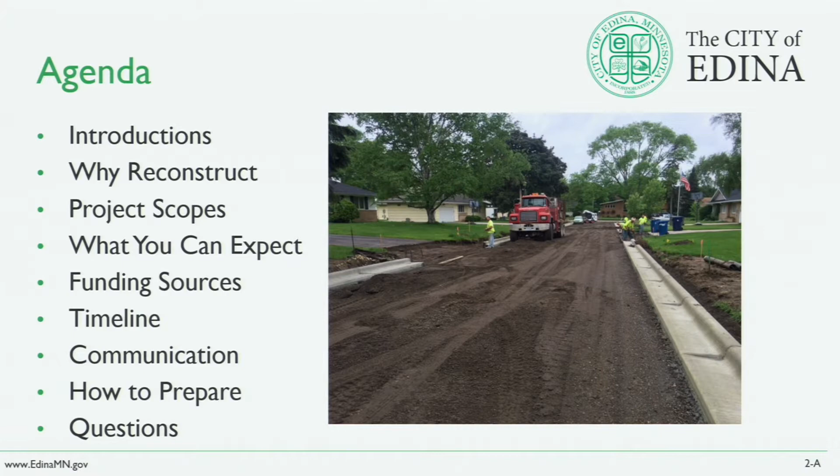Here's a summary of our agenda. We're going to go over introductions to the engineering department, why we're reconstructing your streets, the project scopes including roadway and utility improvements, what you can expect, the funding sources including estimated assessment ranges, the typical project timeline, communication including how we'll communicate with you and how you can provide input, how you can prepare for street reconstruction, and we'll conclude with the different ways you can ask us questions.

There are two reconstruction projects proposed for 2021. The Melody Lake neighborhood is located in central Edina. There are approximately 309 properties within the project limits, and it has primarily local streets with the exception of Benton Avenue and Hanson Road. Benton Avenue will not be reconstructed as part of this project as it is a state aid route and has recently had a large maintenance project completed.

The Creek Knoll neighborhood is located on the northeast side of Edina. There are approximately 113 properties within the project limits and it has primarily local streets. The neighborhood borders Minneapolis, and Minneapolis will be providing some cost sharing for 54th Street.

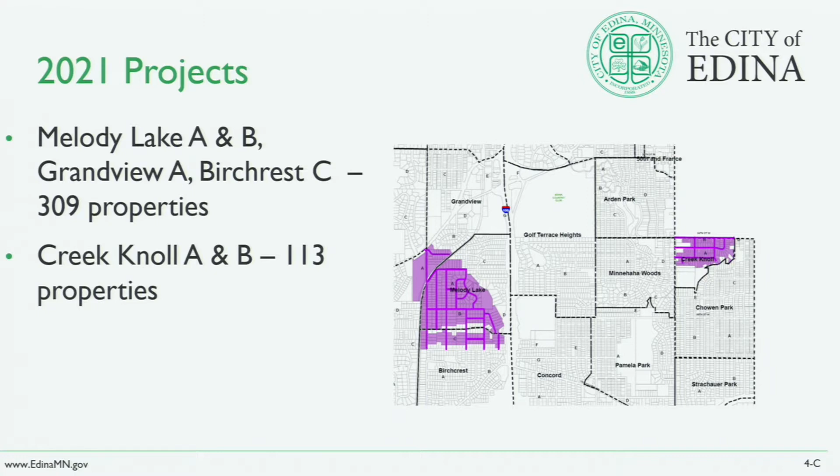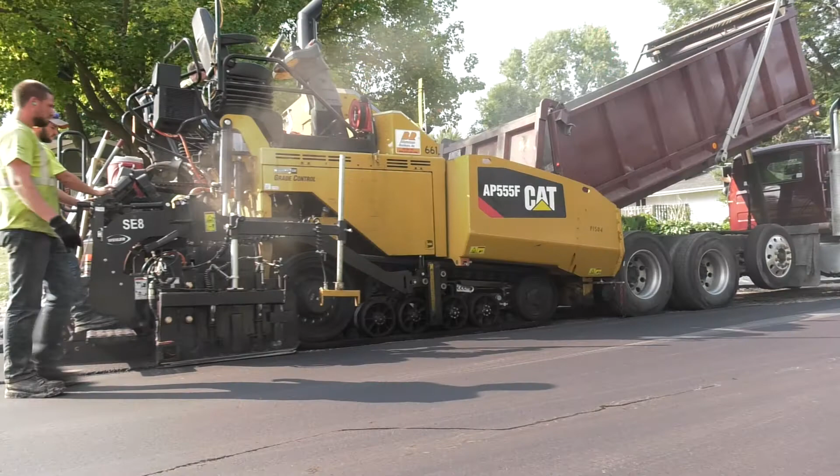People often wonder, why my street? Originally, as part of the initial street reconstruction program, streets were grouped into neighborhoods. Instead of picking and choosing streets randomly throughout the city for reconstruction, it was decided to choose neighborhoods. These neighborhood groupings allow for economy of scale for reconstruction and maintenance projects. By maximizing maintenance areas, pavement life is extended because more pavement can be reconstructed and maintained.

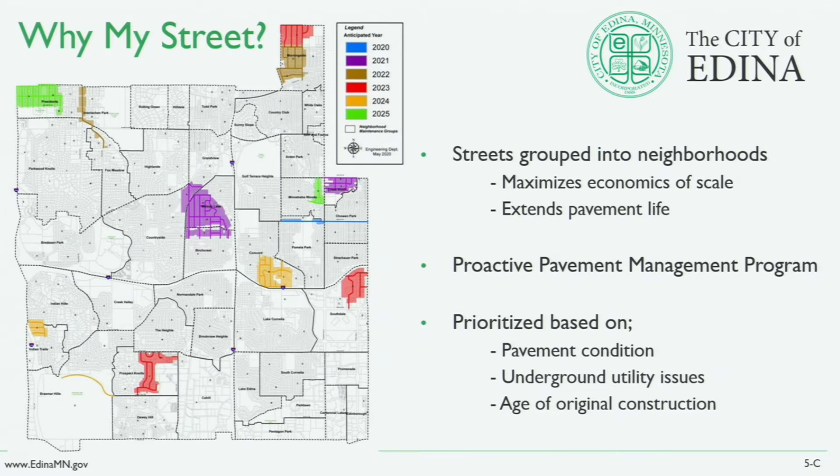In addition to neighborhoods being created, the city also started a proactive pavement management program. As part of this program, pavement conditions are evaluated every 4 years and given a rating of 0 to 100. 0 is a failed roadway or gravel road, 100 is a new roadway. When pavement conditions in a neighborhood average below a certain threshold, the neighborhood is placed into the reconstruction planning process.

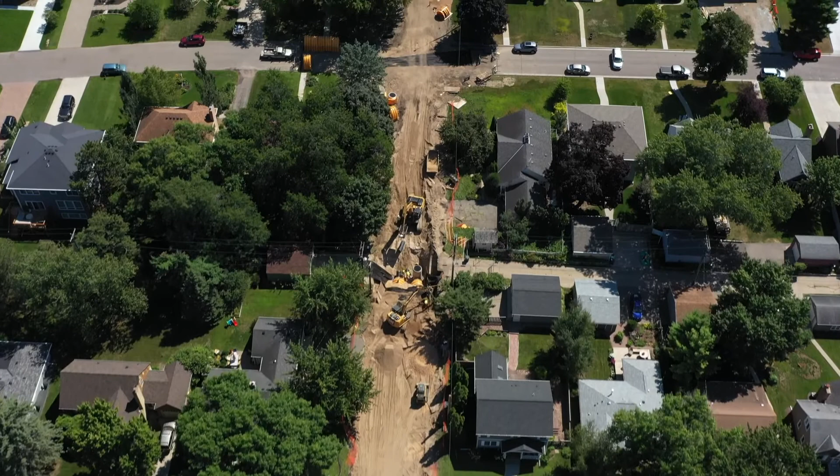In addition to pavement condition, the city also reviews the condition of any public underground utility or need for additional utilities as part of the street reconstruction program. The age of original construction is a factor, however isn't typically the driving force for any project.

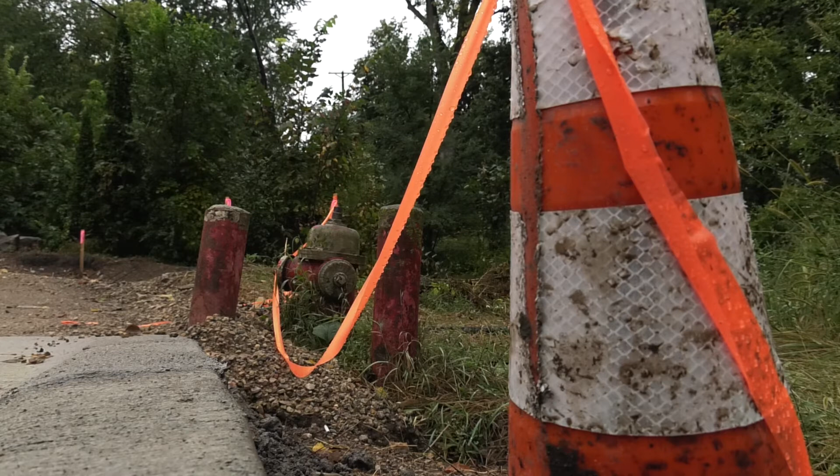So why are we proposing full street reconstruction? The streets were originally constructed in the 1940s to 1980s. Some of them are nearly 80 years old. You can see some of the streets that are in poor condition as noted in the photograph. There's also utility issues to address beneath the roadway. And at this age and condition, street reconstruction is more cost effective than other maintenance strategies like mill and overlay and seal coat.

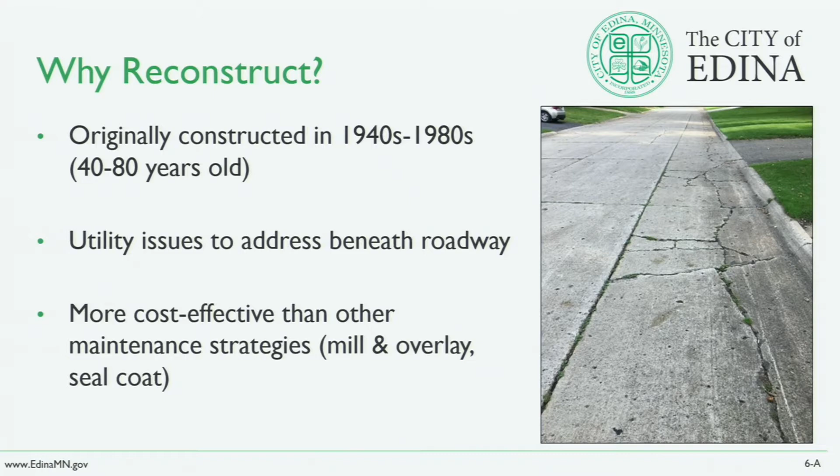Existing roadway conditions: the pavement is reaching the end of its useful life. Some of the streets are in very poor condition as shown in the photograph. Some streets have curb and gutter and some do not. Curb and gutter does help maintain the structural integrity of the pavement, particularly along the edge of the pavement. Some properties already have concrete driveway aprons and some do not.

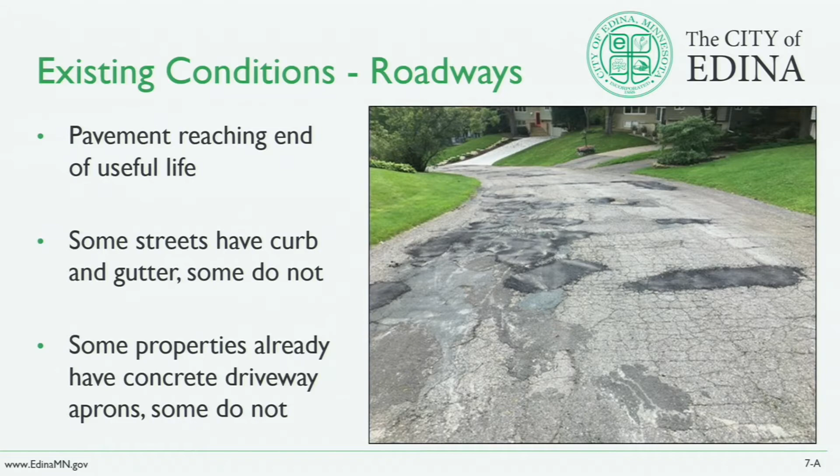We're also going to assess the existing conditions of the utilities in your neighborhood. We're going to look at the water main and analyze the existing pipes with some non-invasive technology. If those pipes show loss in wall thickness, we're going to consider them for reconstruction.

We're also going to see if there's any undersized water mains in your neighborhood, and if there are, we're going to replace them. We're going to look at the sanitary sewer and see if there's any localized defects, cracks, breaks, or sags, and we're going to replace those. We're also going to see if there's any inflow and infiltration occurring in that sanitary sewer system, and if there is, we're going to fix it.

We're going to look at your storm sewer, see if there's deficiencies in the structures of the catch basins or the pipes themselves, and look at the pipes to see if they're undersized. We're also going to look at your curb and gutter to see if it's failing, and if it is, we're going to replace it.

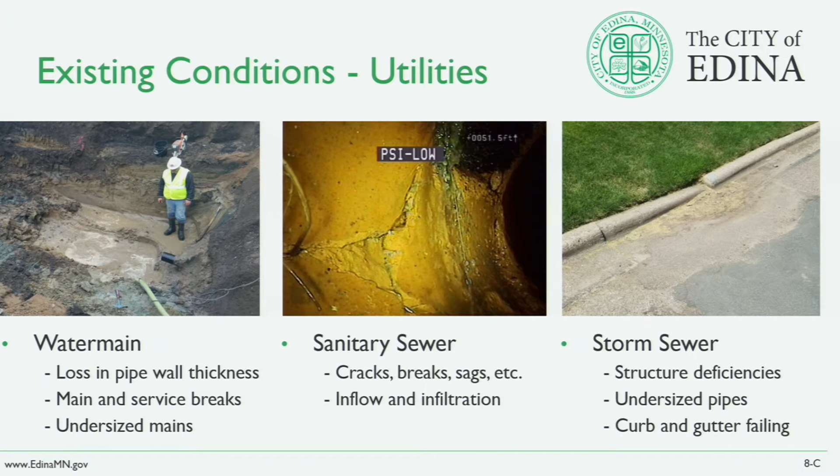We're also going to look at the right-of-way and look at what's in it. City staff will inventory and assess private infrastructure in the public right-of-way. Some private infrastructure might include unique or extensive landscaping, sidewalks from the roadway to the resident's home, steps, mailboxes, and other decorative features. We will also identify any irrigation systems or pet fences that will likely be disturbed by our construction project. All of these items will be repaired, reinstalled, or replaced as part of the reconstruction project.

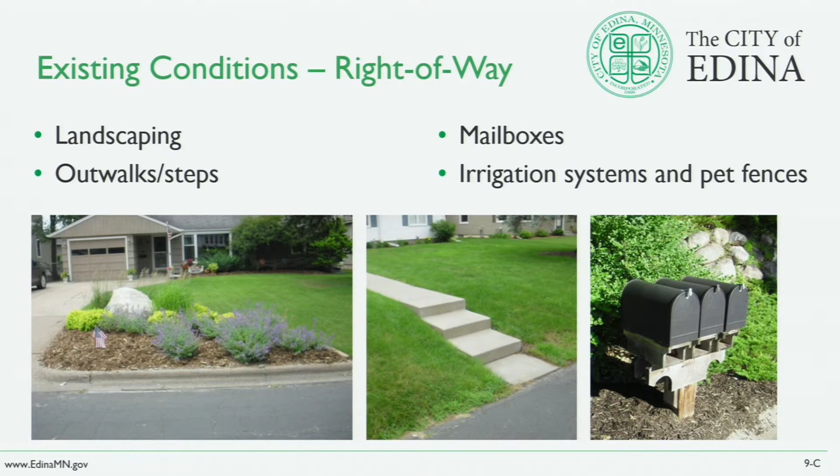As construction nears, our project team will coordinate with individual homeowners any needs their particular property may have with regards to these items. What is the right-of-way, and where is it located in relation to your street?

The right-of-way is typically for public streets, alleys, sidewalks, and public and private utilities. As referenced in the exhibit, the right-of-way is typically 60 feet wide for local streets and 66 feet wide for municipal state aid streets. Municipal state aid streets are typically your higher volume streets and your non-county roads.

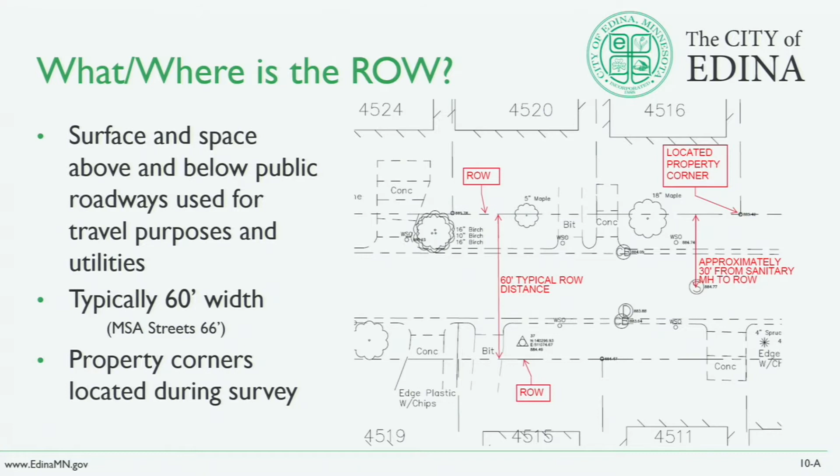Many of your streets are roughly 30 feet wide today. That leaves an additional 15 feet of right-of-way on either side of the roadway. We survey a portion of your property corners to determine the right-of-way location. I bring this up because the contractor may be utilizing the majority of the 60-foot right-of-way for construction or storage of materials.

Proposed roadway improvements. We're proposing concrete curb and gutter where no curb and gutter exists today. We're also proposing replacement of curb and gutter, either all of it or just portions of it. Curb and gutter replacement is primarily based on either the condition of the existing curb or the potential for utility improvements that may impact the curb and gutter.

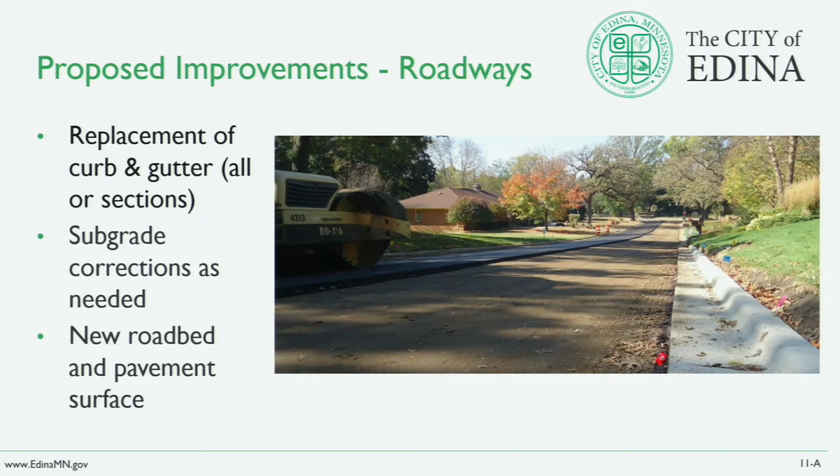Subgrade corrections may be needed. If the soils underneath the pavement are soft and spongy, we'll replace those with more stable soils. A new gravel roadbed and asphalt pavement surface will be installed. There are concrete streets along a portion of these neighborhoods. Those concrete streets will be replaced with asphalt pavement.

Other proposed improvements include modern design elements such as the Edina Living Streets Plan that was adopted by the Edina City Council in 2015. The Edina Living Streets Plan creates a set of standards that balances needs of motorists, bicyclists, pedestrians, and transit riders by incorporating minimum roadway design elements.

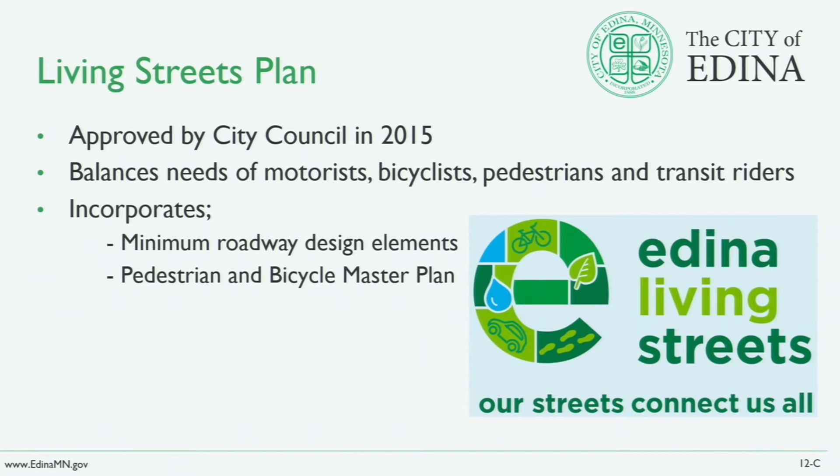The Living Streets Plan also allows for uniform build-out of the pedestrian and bicycle master plan, which includes sidewalks, bike paths, and active routes to schools. As part of the Living Streets Plan, typical roadway sections were developed to be incorporated in reconstruction projects.

The majority of the streets in the 2021 projects are local streets without sidewalks. Typically, they will measure 27 feet from the face of curb to face of curb, offer 2 lanes of traffic, and parking on both sides of the street. More information regarding living streets and the typical sections can be found on Better Together Edina.

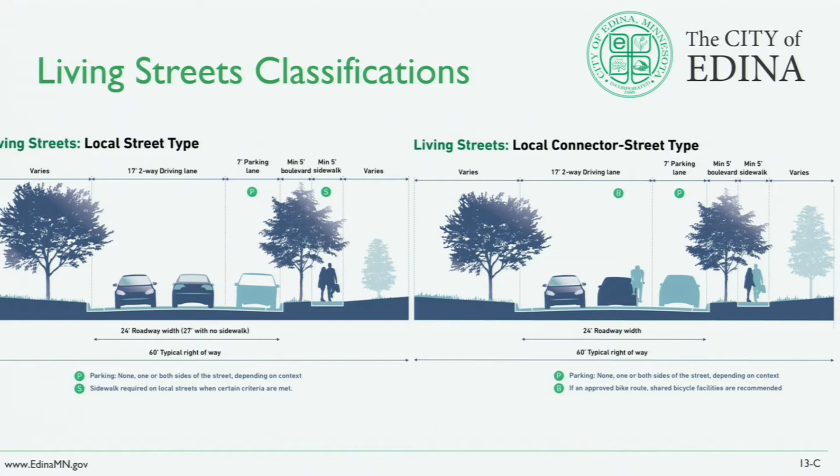Proposed driveway improvements. For projects getting new concrete curb and gutter, the end of your driveway will be impacted by construction. Therefore, aprons will be replaced or installed to comply with city standards. If you have special driveway materials that are impacted by construction, we'll replace those in kind to the best of our ability. Examples of special driveway materials include paver blocks, colored concrete, stamped concrete, and exposed aggregate.

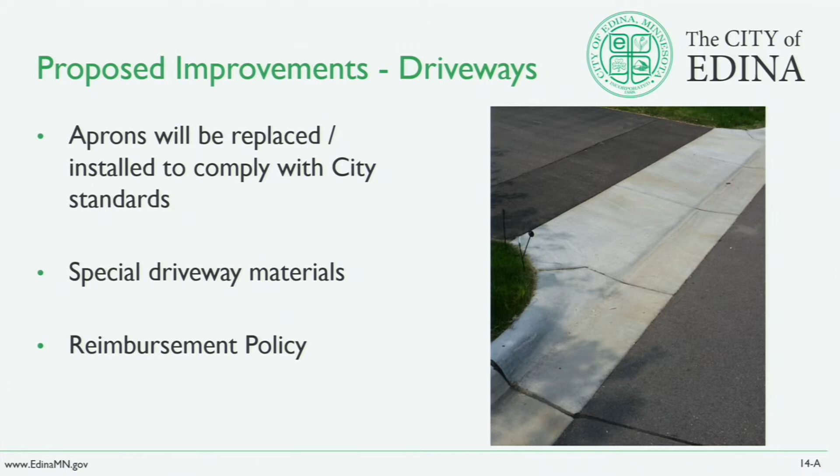If you hire a contractor to replace a portion of or your entire driveway during construction, the city will reimburse you at the city's contract price for the portion impacted by the street reconstruction. This is optional. If you do not hire a contractor to replace your driveway during construction, this reimbursement is not available, and the city's contractor will repair the driveway that's impacted by construction.

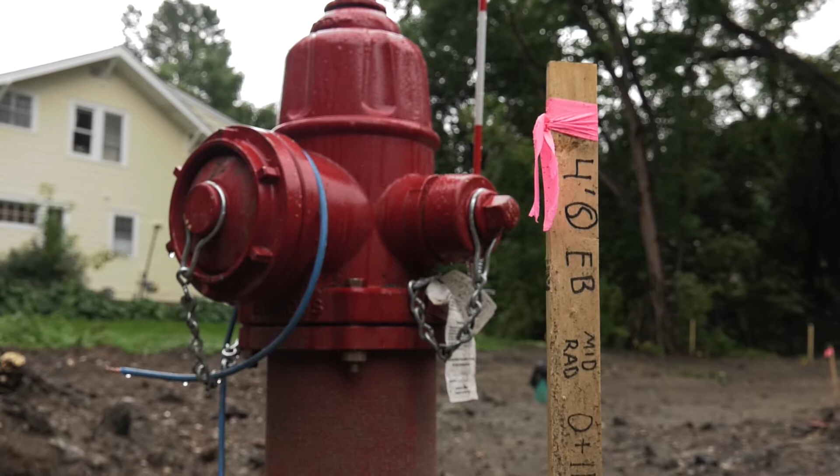Proposed utility improvements may include localized water main and service replacements. We will be looking at the condition of the existing water main pipe to determine if there's any pipe loss, as well as a history of water main breaks. We're proposing new fire hydrants to meet city standards, as well as replacing gate valves.

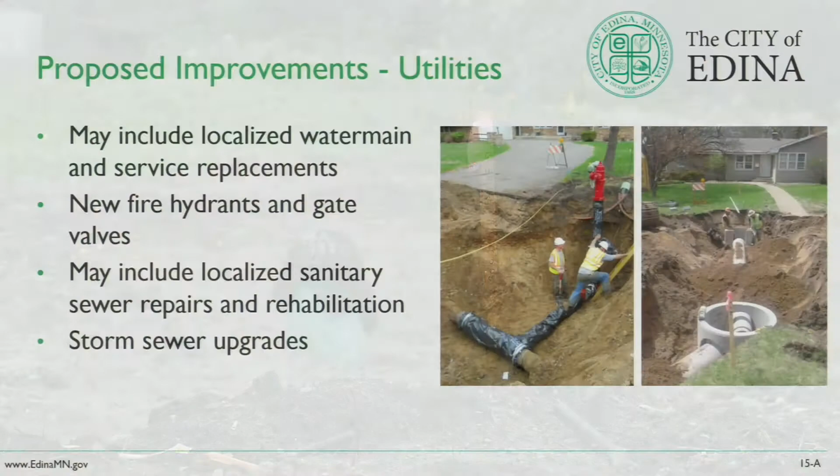This may include localized sanitary sewer repairs and rehabilitation, such as cured-in-place pipelining, which will minimize infiltration and provide structural pipe support. We'll also be looking at storm sewer upgrades, which include potential replacement or extension of storm sewer pipes.

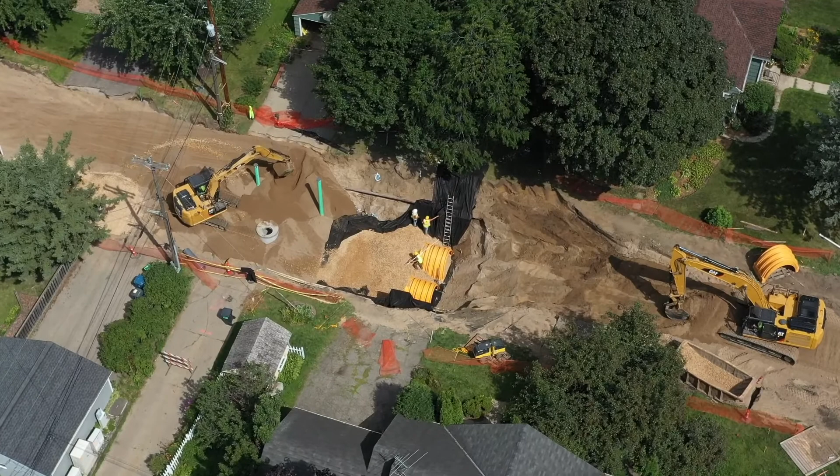When feasible and warranted, the city installs a sump drain line with reconstruction projects. This line allows homeowners to directly connect their sump lines to the city storm sewer network. The city encourages residents to connect when possible, but it is not mandatory. City staff will notify residents when the line can be connected to, and a homeowner will need to hire a private contractor to do the work, with a permit required.

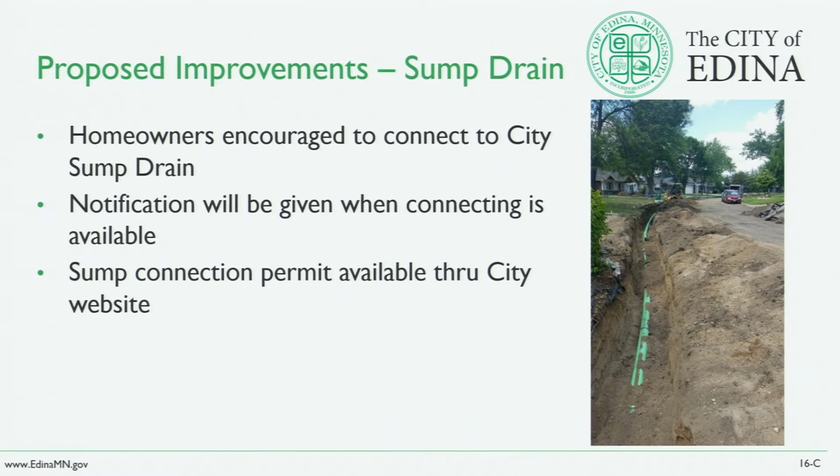Utility ownership, referencing water services and sanitary sewer services. The City of Edina owns the water service from the main in the street to the water shutoff, noted in the exhibit with the letter A. The water shutoff is noted with the letter E. Residents own the water service from the home to the water shutoff, noted with the letter B.

Residents own the sanitary sewer service from the home to the main out in the street, noted with the letters C and D. Many of the resident-owned services may be nearing the end of their useful life. Therefore, we recommend inspecting private services prior to construction.

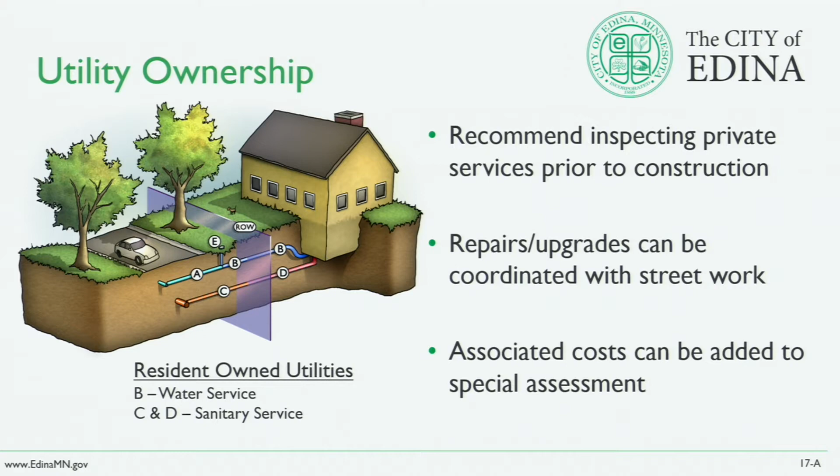If you inspect your services and deem that they need to be replaced, the repairs and upgrades can be coordinated during the street reconstruction work, or added to your special assessment. These repairs or upgrades are optional. However, if a repair of the sanitary sewer service is necessary after street reconstruction is complete and the street is damaged due to the repair, it can be much more expensive than if completed during street reconstruction. Therefore, we do emphasize inspecting your private services prior to construction.

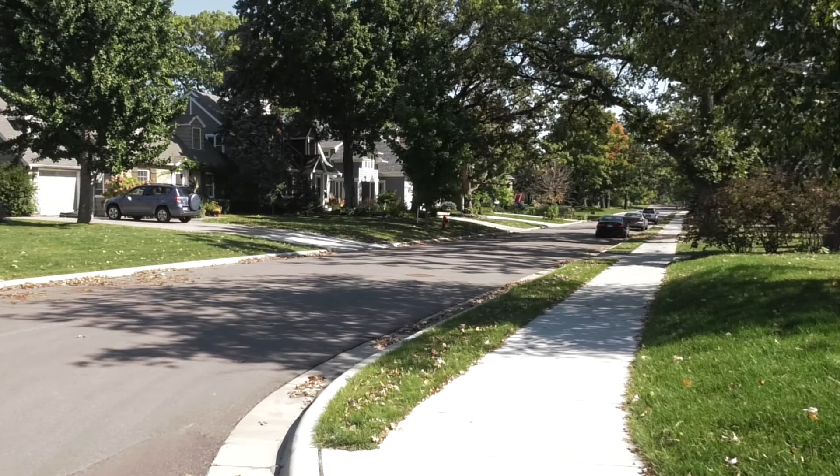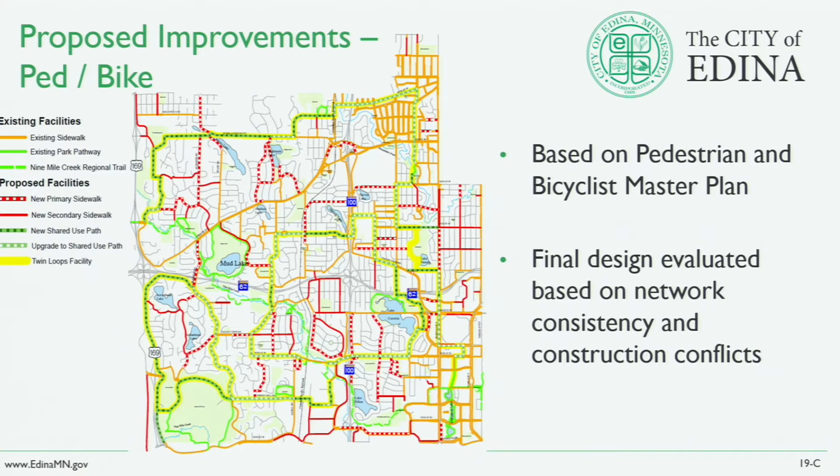There could be pedestrian and bicycle improvements as part of your project. Proposed bicycle and pedestrian routes are based on the Pedestrian and Bicyclist Master Plan, developed as part of the 2014 Comprehensive Plan Update and incorporated into the Living Streets Plan. Final design and evaluation are based on network consistency and construction conflicts.

Private utilities—gas, electric, telephone, and cable—may upgrade or repair their utilities before construction begins, though it's more likely to occur during construction. For example, CenterPoint Energy may be upgrading their gas mains during construction, and may also choose to upgrade the gas services to resident homes.

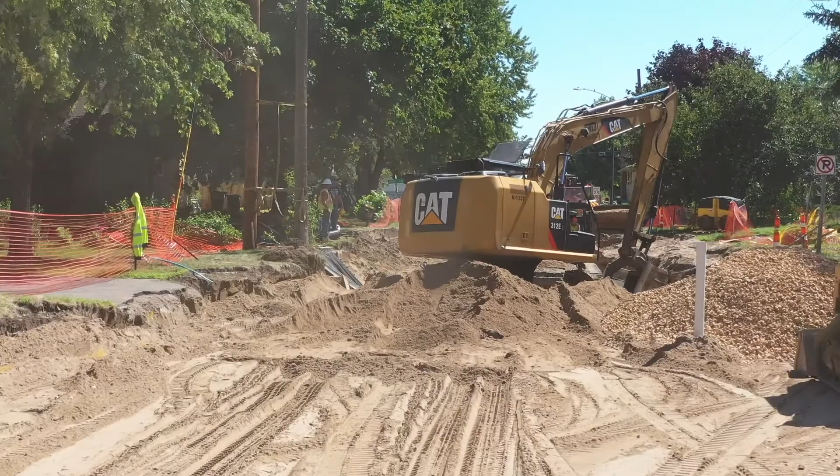There may be potential city-required relocations. It's possible that street reconstruction may require Xcel Energy to relocate a utility pole. Our goal is to streamline the projects, both the private utility project and the street reconstruction project, and minimize neighborhood disturbance. We want to avoid private utilities coming in a year or two after construction is complete and tearing up the new asphalt road surface or the lawn in the city right-of-way.

Streetlight upgrades are typically not included with the project. We did mail you a postcard that included a questionnaire, and one of the questions was about streetlight upgrades. Streetlight upgrades are dependent on your comments in the questionnaire. If streetlight upgrades are recommended by the property owners, it's critical to note that the streetlight upgrades are 100% assessed to the residents.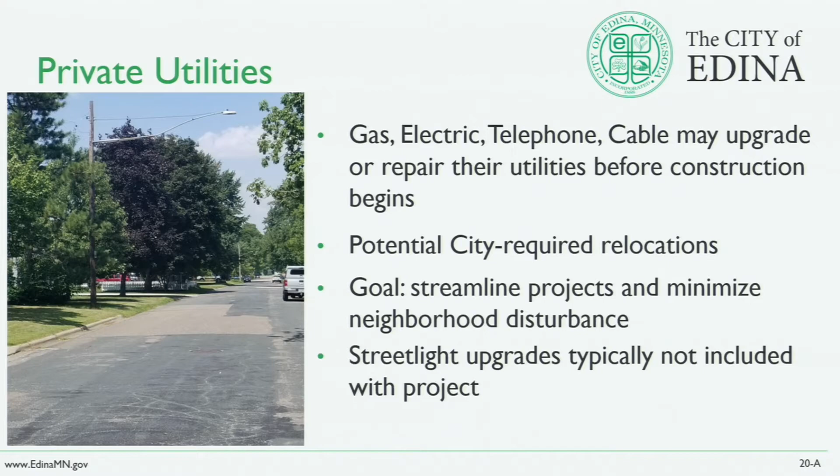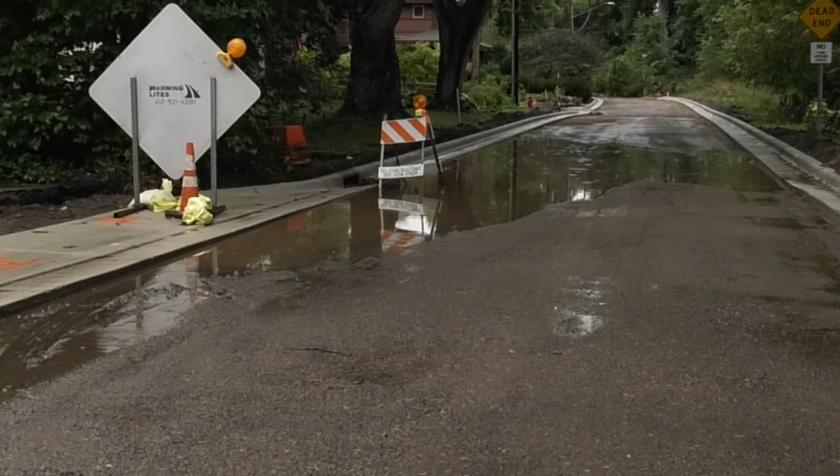What can you expect during street reconstruction? Dust, mud, noise, and vibrations. You can also expect localized flooding during rainfall—once the pavement surface has been removed, stormwater can have a more difficult time draining to a storm drain. You can also expect occasional delays due to inclement weather.

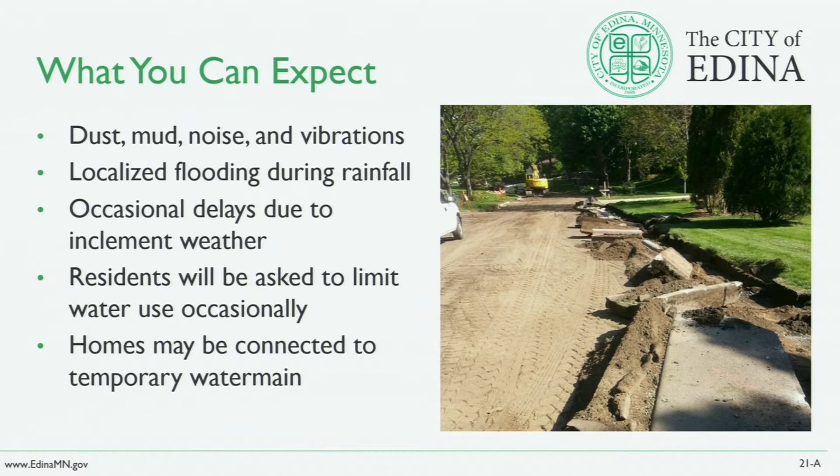Residents will also be asked to limit water use occasionally, for example during sanitary sewer lining. You'll be asked to limit your water use for a period of hours, not days. Homes may be connected to a temporary water main if the water main is replaced in front of your home, and you'll be without water for a period of hours, not days.

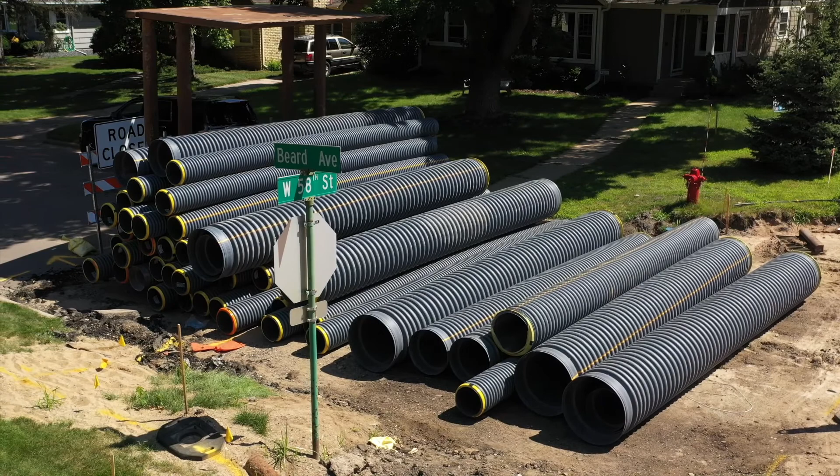You may also see things like pipe stockpiled along the edge of the roadway. In instances like this, the roadways will remain passable and access to driveways will be maintained. Space during reconstruction projects can be limited, and while city staff and our contractors do their best to locate storage areas within or near the project limits, project materials can and will be stored within the city right-of-way, including yards.

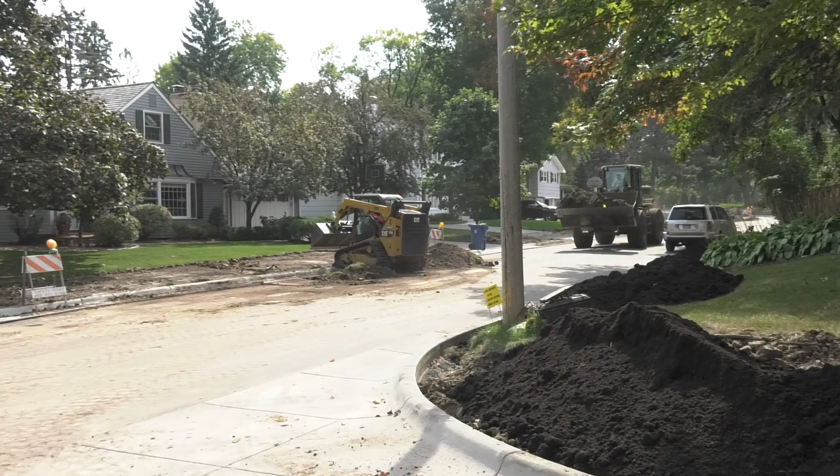Recall that the typical city right-of-way is typically 60 feet. Most often, yards are used for storing utility pipes and their related parts. Our contractors do try to minimize the amount of space encroached on, and typically you will see 5 to 10 feet beyond the curb used for this purpose. Construction equipment is stored typically within the roadway and on the roadway base.

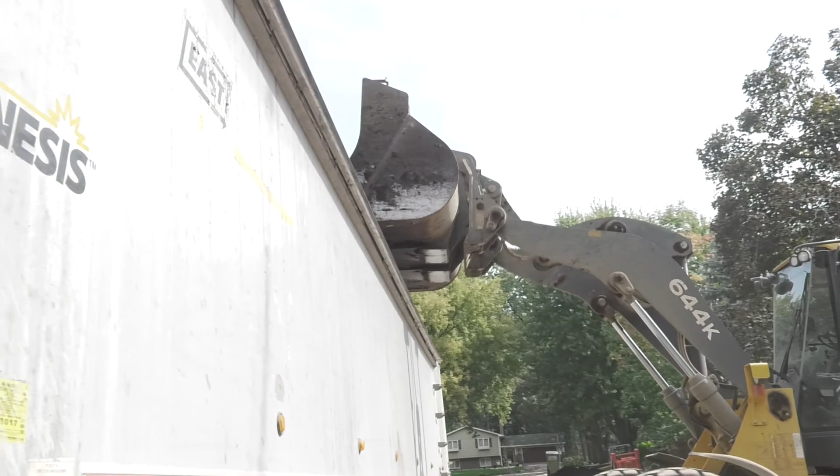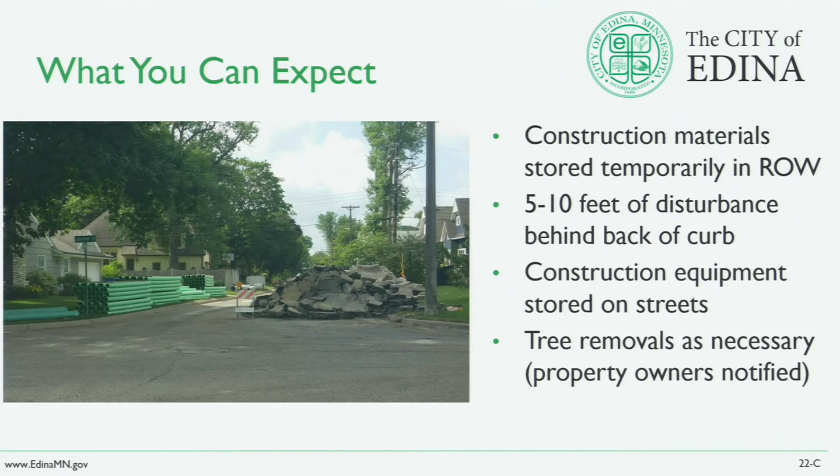There will likely be tree removals as part of your project. While we do our best to protect all the trees within project areas, there are times when trees will need to be removed. City staff will notify and work with residents that have tree removals proposed.

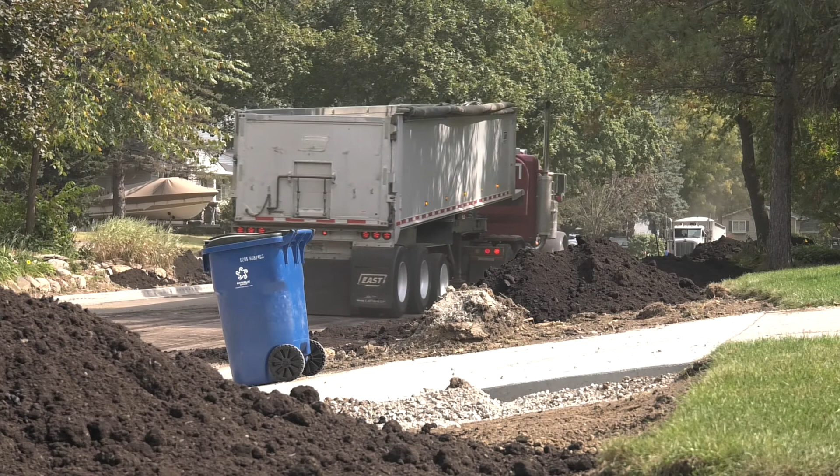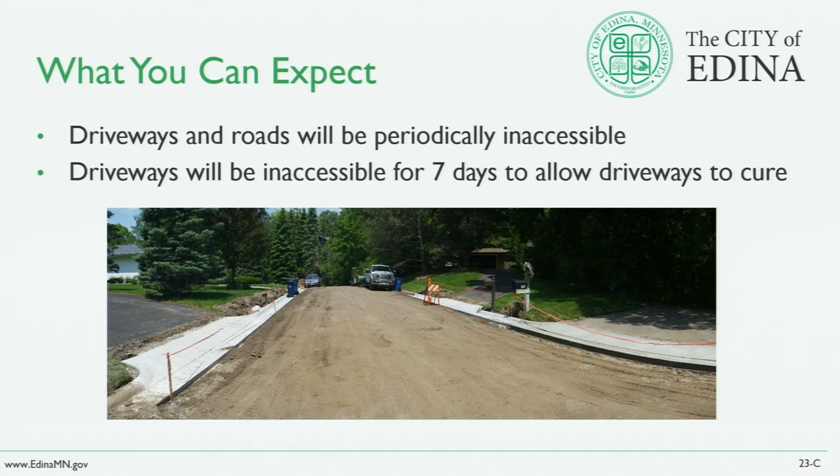There might be times when you are unable to access your driveway. Some instances might be a few minutes in length, some might be a week in length. Those instances that are a few minutes in length will be unpredictable, and our contractors will work as fast as they can to provide you access. Utility work can limit access up to a full day, while curb and gutter and driveway aprons can limit access for up to a week. For those times that are longer, notice will be given that access will be limited at least 24 hours in advance.

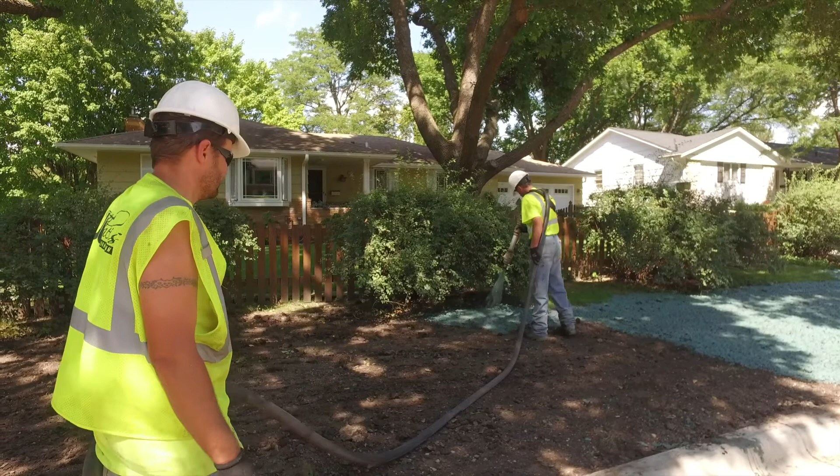Items within the city's 60-foot right-of-way may be damaged. You can remove plants or other landscaping features before the project if there's something that's near and dear to your heart. Otherwise, we will replace plants and landscaping features to the best of our ability. Irrigation and pet fences will likely be damaged. They'll also be repaired. Disturbed areas will be seeded and hydro-mulched.

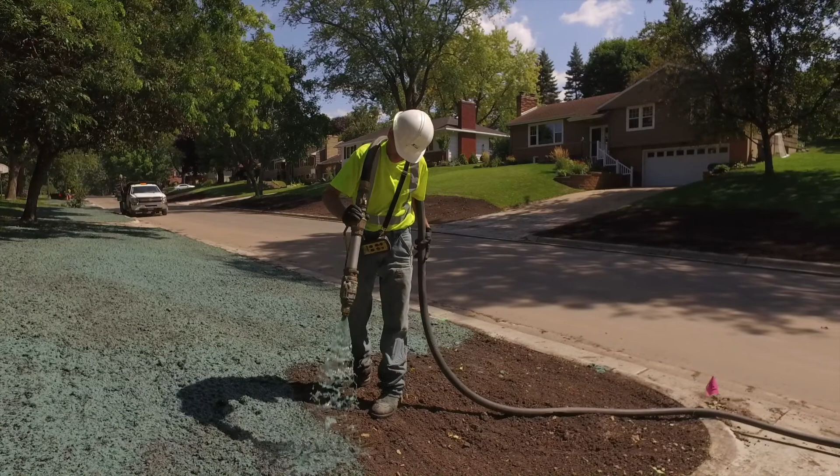We are going to provide opportunities for input. Please recall we mailed you a postcard with a questionnaire. Hopefully you had a chance to respond to that questionnaire. We're going to keep you informed. Stay tuned for future slides on this one.

We're going to do our best to minimize inconveniences. It's going to be dusty, dirty, and loud. There may be large equipment operating in front of your driveway. We will do our best to minimize these inconveniences. Our contractor is going to accommodate residents with special access needs. Examples of this include metro mobility or unique medical access needs. We'll want to know about these prior to construction, so reach out to us.

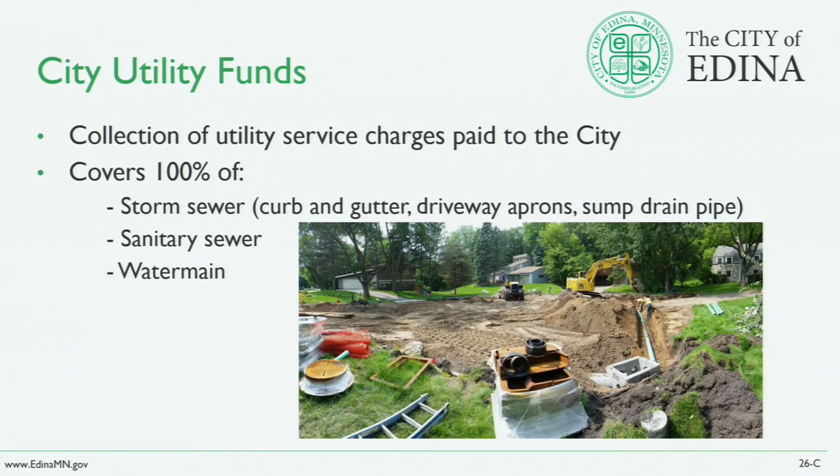City utility funds. Utility improvements are paid for through the city utility funds. These funds are established by the collection of utility service charges. You can see a breakdown of these charges on your most recent city utility bill. 100% of the costs related to water main, sanitary sewer, storm sewer improvements, including curb and gutter, driveway aprons, and the sump drain line, are paid for by these funds.

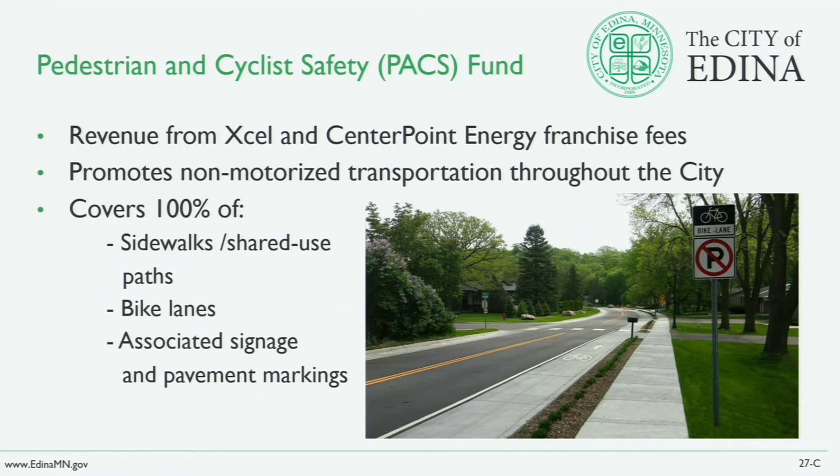Pedestrian and Cyclist Safety Fund. The PACS fund is revenue generated from Xcel Energy and CenterPoint Energy franchise fees, which can be viewed on your most recent utility bills. The goal of these funds is to promote non-motorized transportation throughout the city. 100% of the cost for sidewalks, shared use paths, bike lanes, and other work associated with these improvements are paid for by the PACS fund. These improvements used to be assessed to residents.

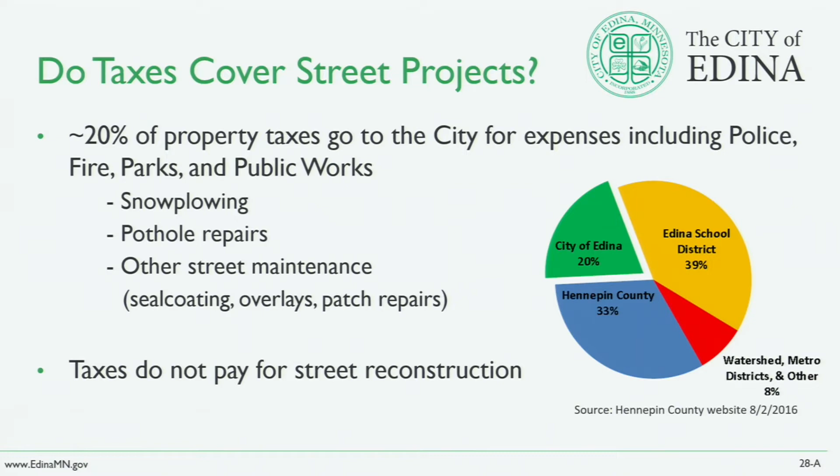Therefore, special assessments are necessary. Special assessments are assigned to benefiting properties of public improvements. Assessments cover 100% of the roadway costs for local streets. Assessments cover 20% of the roadway costs for municipal state aid roadways. MSA roadways are your higher volume roads that are non-county roads.

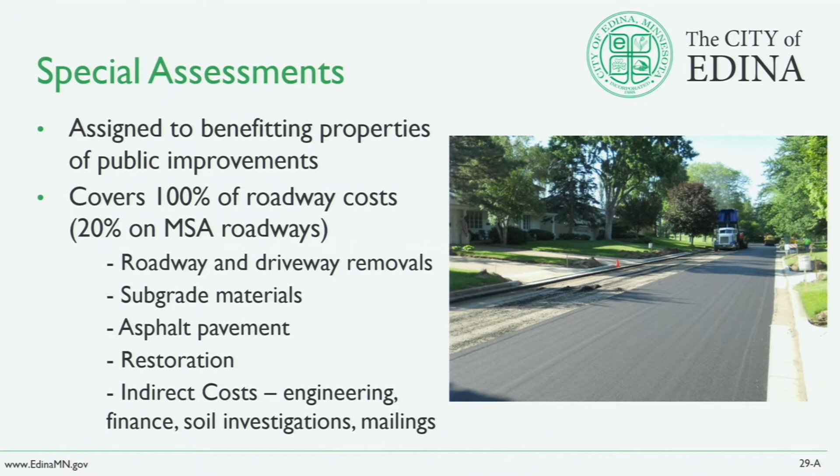Examples of roadway costs that are assessed include roadway and driveway removals, subgrade materials, asphalt pavement, and restoration. Also included are indirect costs like engineering, finance-related costs, soil investigations, and mailings. Not included in the assessments are improvements related to water main, storm sewer, sanitary sewer, sump drain, curb and gutter, and sidewalks.

Assessments are based on residential equivalent units, or REUs. The typical REU factor in a neighborhood reconstruction project is a single-family home, which has an REU factor of 1.

Multifamily properties have an REU factor of 0.8 for duplexes and twin homes, or 0.5 for apartments and condos. Properties with side streets adjacent to them outside the project limits will have a 50% reduction factor applied for their REU calculation. When the other adjoining streets are reconstructed, another assessment will be applied for the remaining 50% REU.

Your property's portion of the assessment is your REU factor divided by the total number of REUs, multiplied by the total assessment amount. Other land use types have different REU factors. For more information about the assessment policy, please contact city staff.

Let's talk project specifics regarding Melody Lake A and B, Grandview A, and Birchcrest C neighborhood grouping. Excluded from the project area is Benton Avenue, which is a municipal state aid street. Those are reconstructed separately from local streets. There are 309 properties, equivalent to 303.02 REUs, and 3.88 miles of road.

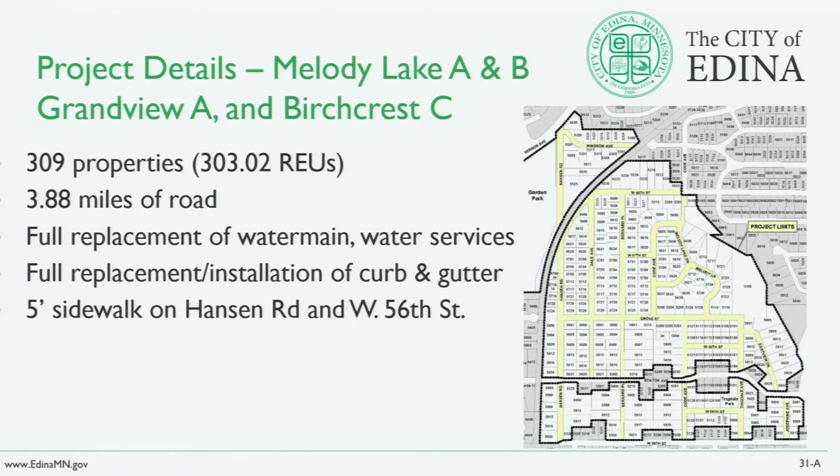We're proposing 5-foot concrete sidewalk on the west side of Hansen Road and the south side of West 56th Street. The pedestrian and bicycle master plan also shows a 5-foot concrete sidewalk along West 56th Street between Code Avenue and Normandale Road. That sidewalk is outside the project limits. We are considering installing that sidewalk in 2021 with this project area, or in a future year as a separate project.

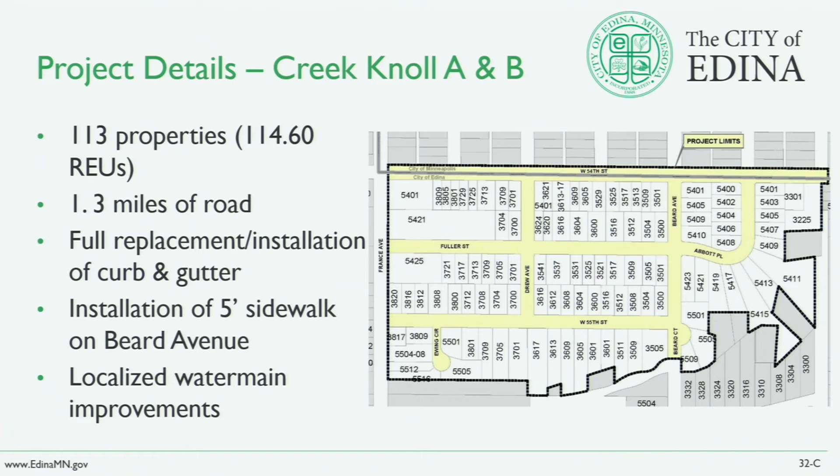Creek Knoll A and B: there are approximately 113 properties within the project limits and 114.6 REUs. We're planning on reconstructing 1.3 miles of road with full replacement or new installation of curb and gutter throughout the project, with the exception of Ewing Circle. Beard Avenue will have the installation of a sidewalk from Minnehaha Creek to 54th Street, and there will be localized water main improvements throughout the project.

Preliminary assessments: assessment amounts per REU are determined by 100% of the roadway project cost divided by the number of REUs. The preliminary estimated assessment ranges per REU are, for Melody Lake, Grandview, and Birchcrest, $17,700 to $24,200 per REU, and for Creek Knoll, $12,500 to $18,100 per REU.

Generally, when you compare the amount of asphalt paving per REU, the higher the value, the more expensive the assessment amount, which is true in this case: 176 to 141. The lower the square yards of paving per REU, typically the higher the housing density in that project area. But the primary reason for the higher assessment amount for Melody Lake, Grandview, and Birchcrest is due to the poor subgrade soils underneath the asphalt pavement that need replacement with more stable soils.

The generally sandy soils of Creek Knoll, we estimate just over $100,000 of subgrade repairs, and the generally soft clay soils of Melody Lake, Grandview, and Birchcrest, we estimate $1.5 million for subgrade repairs. These subgrade repairs are spread over the number of residential equivalent units in each project area.

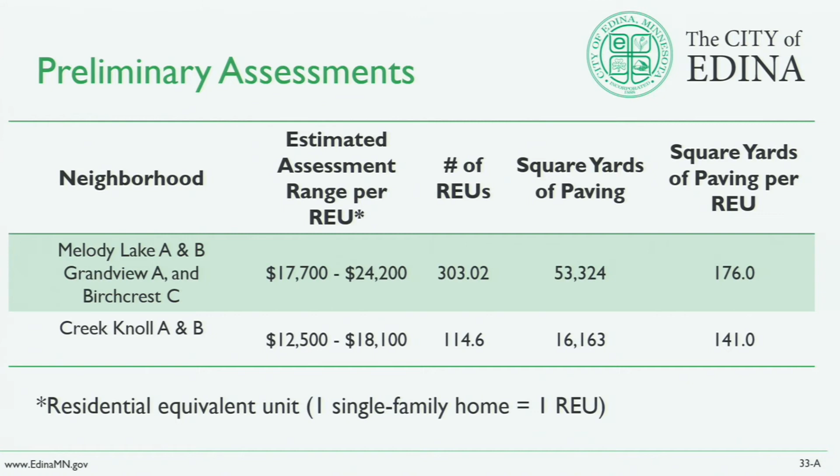These assessment amounts are estimated. The higher end of the range does include a 15% contingency. We do hope these estimated assessment ranges go down after contractor bidding. The actual assessment amounts won't be determined until after construction is complete.

Typical project timeline for street reconstruction: July through September, engineering studies begin and the estimated assessment ranges are provided. December 2020 will be the public hearing, and you'll be invited to that meeting. This is where the council will decide whether or not to move forward with the design of the project.

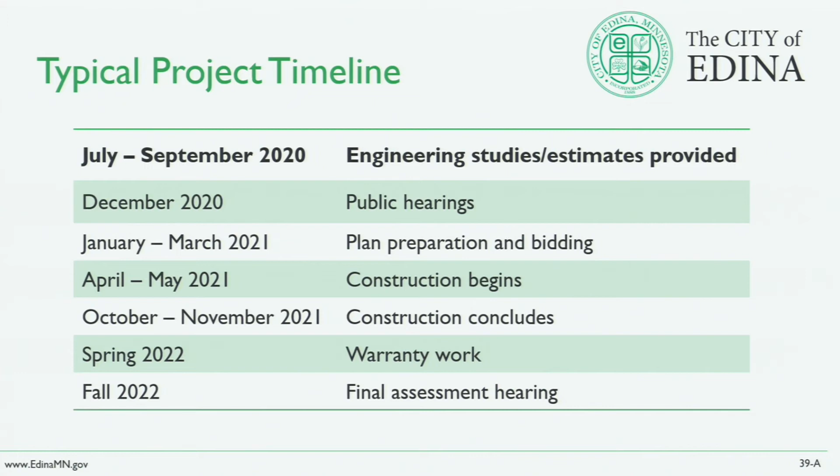January through March will be design, plan preparation, and contractor bidding. Construction will begin in the spring, and you will be notified when construction is scheduled to begin. Construction will conclude in fall 2021. Warranty work will occur in 2022, and the final assessment hearing is scheduled for October 2022.

Assessment timing: after city staff finalizes our engineering studies, a public hearing will be held in December of this year. You will receive notice of the exact time and date of this hearing, and you are welcome to participate. Following the public hearing, pending project approval, construction will be completed through the summer of 2021.

Final costs for assessments will be calculated and submitted for a final assessment hearing in October of 2022. Pending approval, the assessment will be filed with Hennepin County in November of 2022 and will appear on your January 2023 tax statement.

There are a few options when it comes to paying off your assessment. The final assessment mailing will note the following payment options. You can pay the entire amount within 30 days upon receiving the bill to avoid future interest charges.

You can pay a minimum of 25% on the amount due, and the balance remaining rolls over to your property taxes, and you can pay over 15 years with interest on the remaining balance. Or you can roll the entire amount to your property taxes over 15 years with interest on the remaining balance.

Payments may also be deferred if you are 65 years of age or older and meet specific income requirements. Interest charges are 1% over the city's borrowing interest rate to cover borrowing costs. In 2019, the interest rate was 3.92%. Additional assessment information can be discussed with our assessing department.

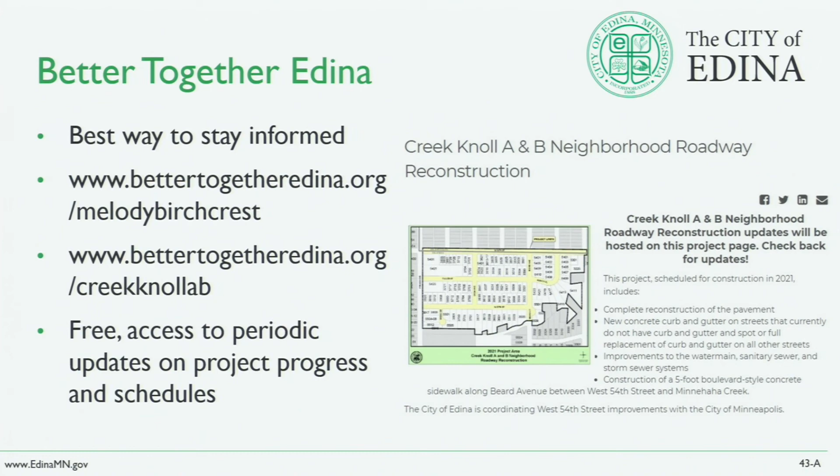There'll be periodic updates on project progress and schedules. Updates during the summer, fall, and winter will be sporadic during major milestones, and during construction you can anticipate weekly updates. We need your input and help to make your project successful.

A questionnaire was mailed to your home in June of this year, or last year for properties north of Grove Street in the Melody Lake project area. Please fill it out and return it. We can't solve problems that we don't know exist.

The questionnaire covers traffic and pedestrian issues, street drainage issues, and street light upgrades. However, as mentioned previously, street light upgrades are assessed to the residents.

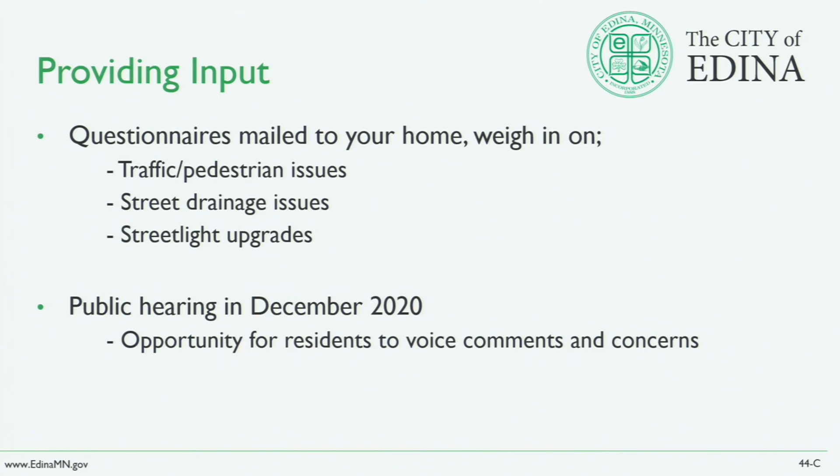Also, at the public improvement hearing in December, you will have the opportunity to voice comments or concerns to the City Council. This is the meeting where the City Council will decide whether or not to move forward with the project. To date, our questionnaire results have had a low response rate. We encourage you to fill out the questionnaire and return it.

So how can you prepare for street reconstruction? Complete the project questionnaire. Again, we mailed you a postcard back in June. Hopefully you had a chance to fill out that questionnaire on Better Together Edina.

Begin financial planning. These projects are expensive and can be a financial burden, so please plan ahead. Coordinate home and yard improvement projects around the street reconstruction schedule.

If you can help it, you might want to hold off on a private driveway replacement until during construction, after curb and gutter has been installed. Otherwise, your new driveway will be impacted by construction. If you're thinking about doing a landscaping project, we recommend that you hold off until after street reconstruction is complete.

You can also prepare by reviewing the Better Together Edina updates, asking questions, and staying informed.

Please contact us. You can either call us or email us, either myself or Liz Moore, our engineering coordinator. Unfortunately, due to COVID-19, you can't stop by the Public Works facility—it is closed to the public. So just reach out to us by calling or sending an email.